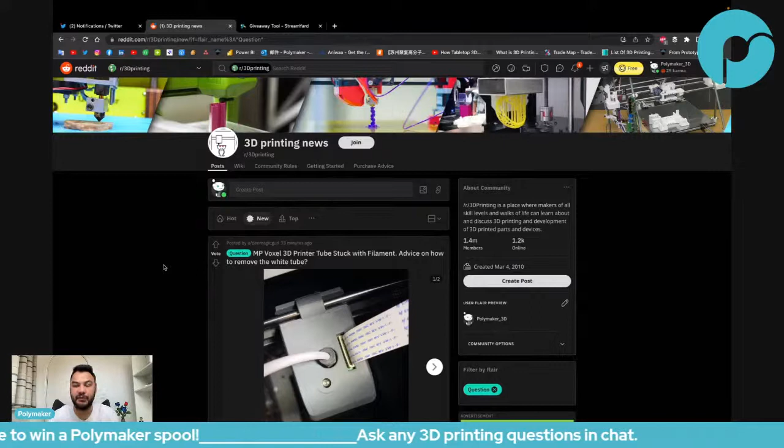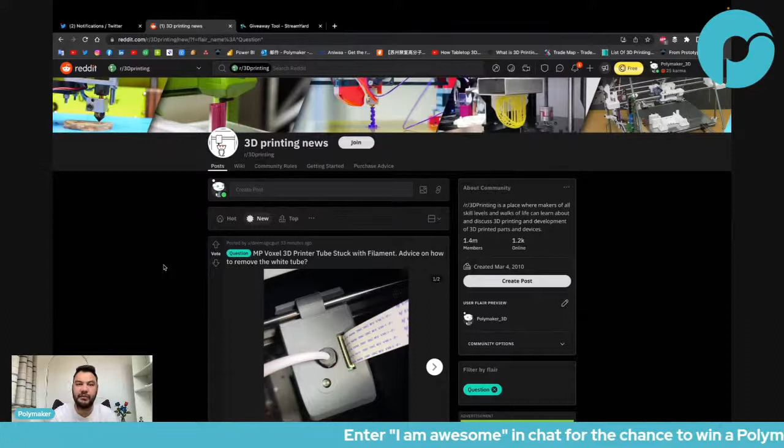So let's get started, good day Randy. Let's get started. So like always, if you have any question, any 3D printing question, whether it's for Polymaker itself, any new filaments, anything related to our company, feel free to ask. And then anything related to 3D printing troubleshooting - if during the week, since last Tuesday, you had some issue with your 3D printer, any material or setting issue, setting recommendation, feel free to ask. If you have some question related to materials, for example, what's the difference between different materials, or about application, what's the best material for that - any particular question, feel free to post it in the chat, and then we'll answer them.

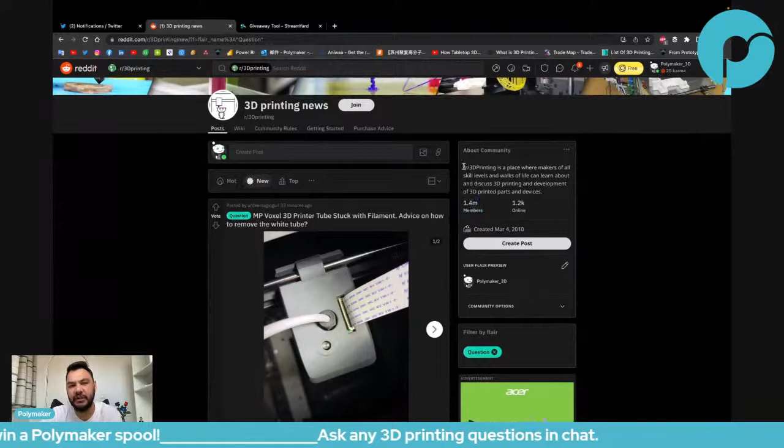And then at the same time, we are going to go through our regular Reddit questions. As you know, this community is a huge community - I think almost 1.5 million members. So you can see a little bit how big the 3D printing community is growing in the world, or at least in the English-speaking world for that particular community. I mean, when I joined the community, I think it was less than 200,000, if I remember well, and that was 6 or 7 years ago. And now you have 1.4 million people. That's crazy how many people have started to use 3D printing.

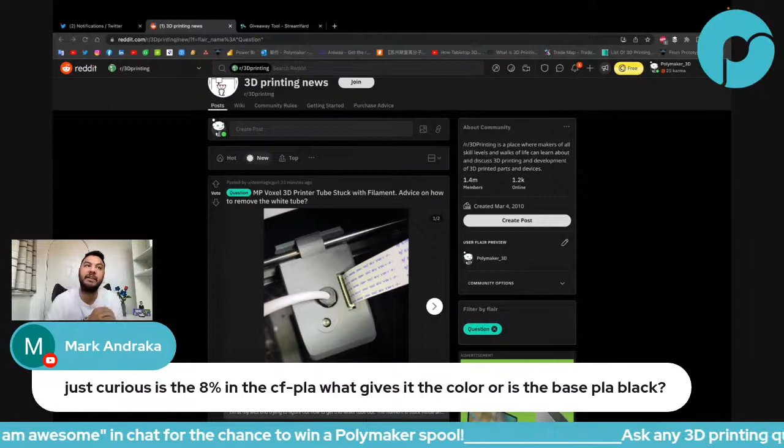Mark Andraka: Just curious, is the 8% in the CF PLA what gives the color, or is the base PLA black? No, everything comes from the carbon fiber. Actually, that's one of the main reasons we cannot do any color with PLA CF - it's because the CF itself makes it black. So even if we add color masterbatch of any other color, it would still look black. Maybe a different kind of black, but yeah, everything comes from the carbon fiber.

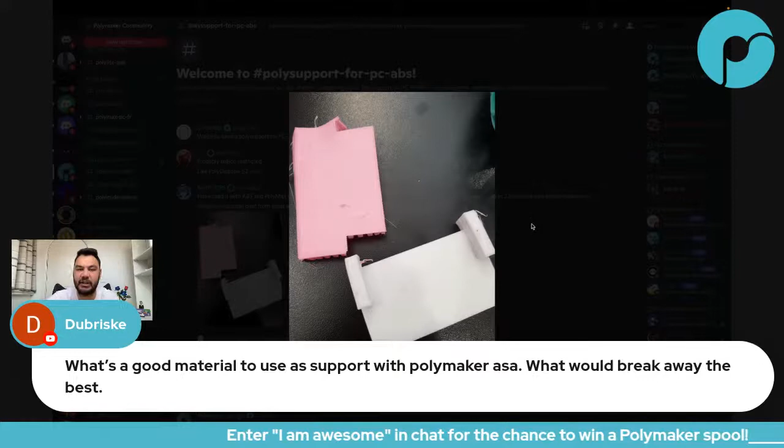What's a good material to use as a support with Polymaker ASA? What would break away the best? You know what, the best material, which will arrive very soon on the market - we removed it for 2 months - is this one, Poly Support for PC-ABS. So if you go on our Discord, you will see that material. It's a pink material, you may know Poly Support for PLA, and this is Poly Support for PC-ABS. So it's more for high temperature, and it works extremely well with ASA. It's a breakaway support. It was available in beta testing, so depending on where you're based, it was available in the US and Canada, and it was removed 2 months ago, and it will come back next month with revisions. We had some feedback from the beta testing, we reviewed the formula, and it will come back.

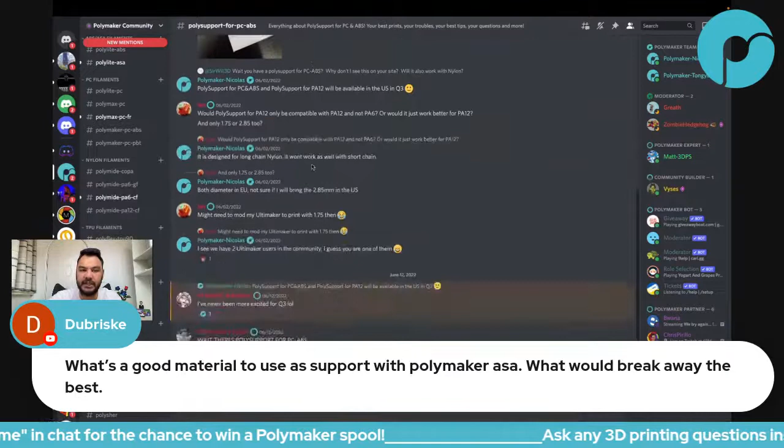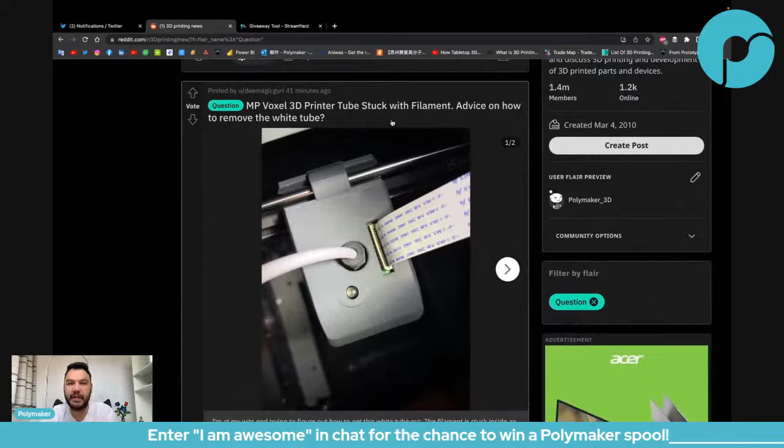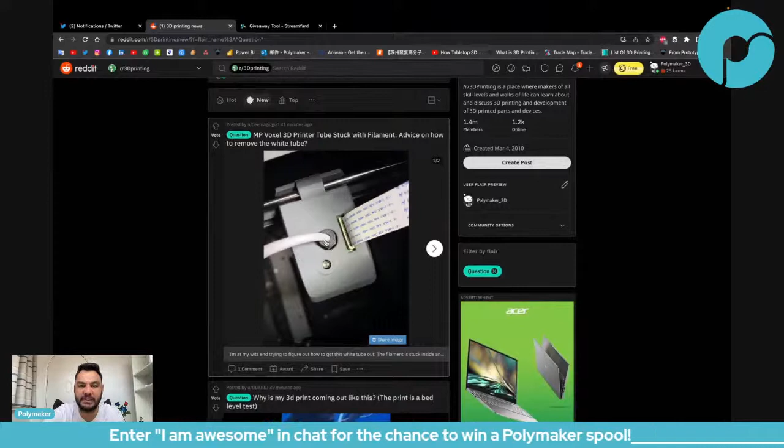Usually to remove that, you just have to press the thingy - I have no idea what it's called, but most pipe systems use this idea. If you pull it, the hooks will catch on the pipe. To prevent that, you have to push the ring here. If you push that ring, then you'll be able to remove the PTFE tube. Yeah, exactly, the small ring here. I guess it's the same system - I haven't seen any other 3D printer that doesn't have this, where you push that ring to prevent the small hook inside from catching the PTFE, and then you just remove it.

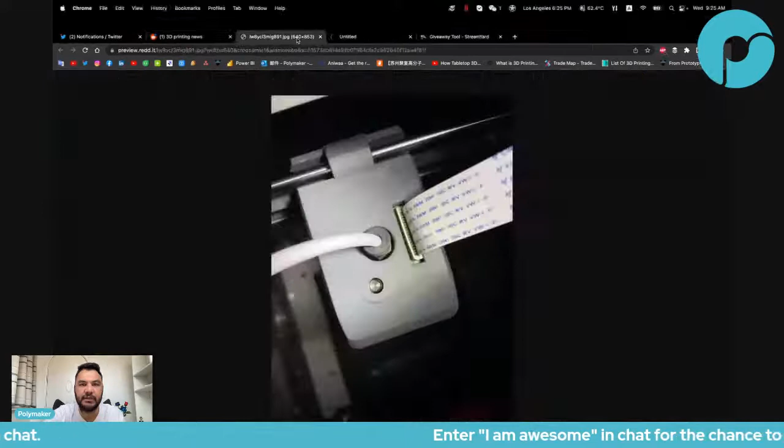Actually, there is one comment - let's make sure his issue was answered. What was that printer? MP Voxel 3D printer. Oh, the Monoprice. Okay, the Monoprice 3D printer. Hard to tell from the photo angle, but if it's the feeding tube pneumatic fitting, you push down the ring. Okay, so that was answered.

The next one. Okay, next question from Jon: Hey Nick, I was wondering, can you overdry filament? In most filament dryers, does it become more brittle?

No. So to answer the first question, you cannot overdry filament. If there is no moisture, then there's no moisture - it's not going to affect anything further, there's no such thing as over-drying. And then, does it become more brittle?

Yes and no. Yes, in a way, because when you're drying the filament, you're applying heat to the system, and if you're drying it, it means your filament has moisture. When you mix moisture and heat, that's the perfect combination to degrade your filament. So the more you dry your filament, the more you're going to degrade it, and the more brittle it becomes. So the fact that it's dry isn't what makes it brittle - it's the fact that drying it puts it in the exact condition to degrade the backbone of the polymer. You break down the polymer into smaller chains, making it more brittle. That's one part.

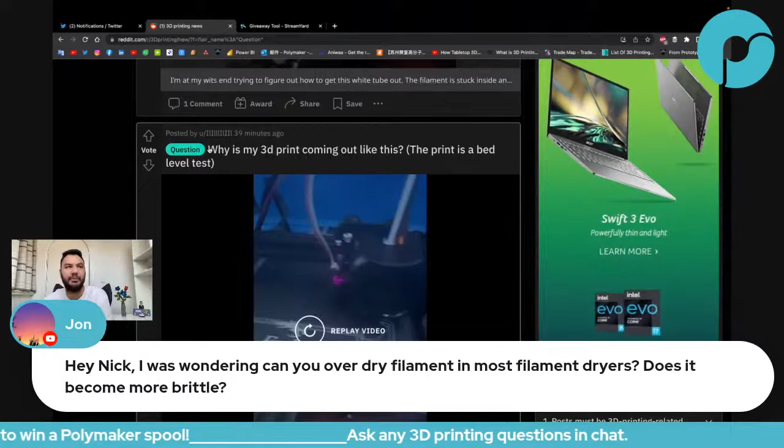The other part is: the drier the filament is, the more rigid it becomes. So you could take this as brittle, but brittle means it's rigid but weak. The fact that there's no water molecule inside will make it more rigid, but not necessarily weaker. So hopefully that answers the question.

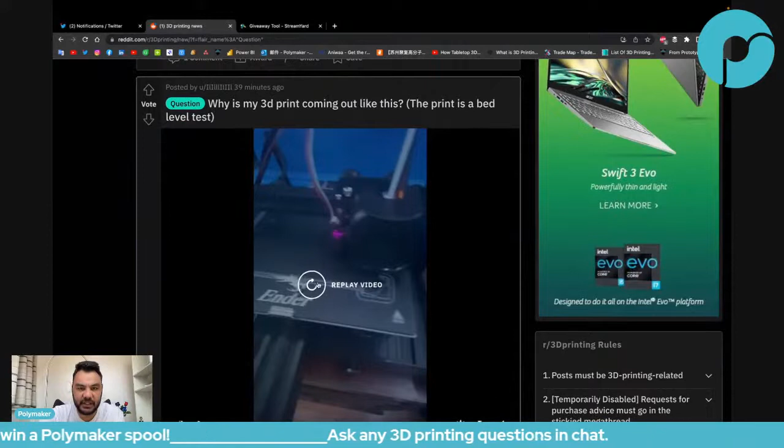Okay, so why is my 3D print coming out like this? Let's check out how it comes out. Okay, so most likely bed leveling - there's no bed leveling, especially since he's doing that bed leveling test. So I'm pretty sure. If we take a look more clearly, I'd say it's too close to the bed, and it's squishing the material out, and this squishy material is catching on the nozzle and creating all this stringy stuff.

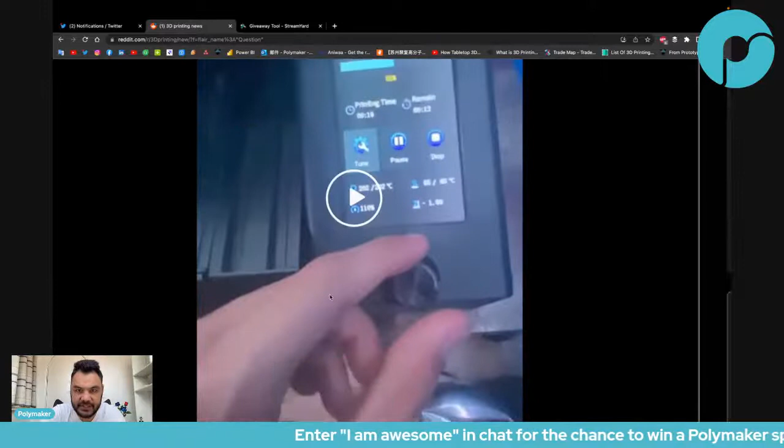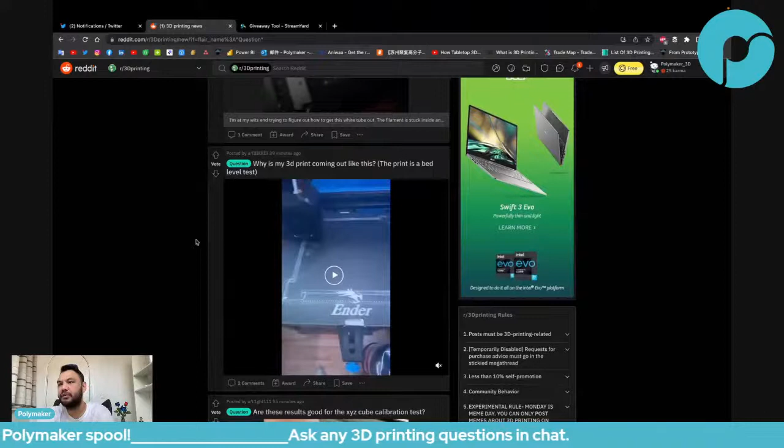But it seems like on most of the bed it was too close. Yeah, I guess that's the issue here. Too far from the bed or too close? Yeah Jon, I think too close. The fact that there is stringing could make us think it's too far, but I think the stringing is caused by squishing the filament, and it comes out the side and catches on the nozzle, creating the string.

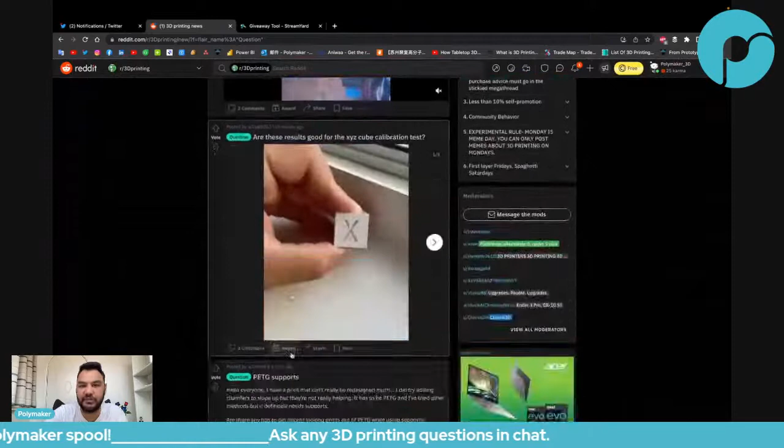Hi Stephen Poole, do you have any 3D printing question for us today? Hi Austin, thank you for joining.

Are these results good for the XYZ cube calibration test? So the calibration test, a lot of people are using it for different purposes. We talked about it on Print Busters in the flow calibration - if you're interested, you can go... let me put that on this side... if you're interested, you can go on our Discord.

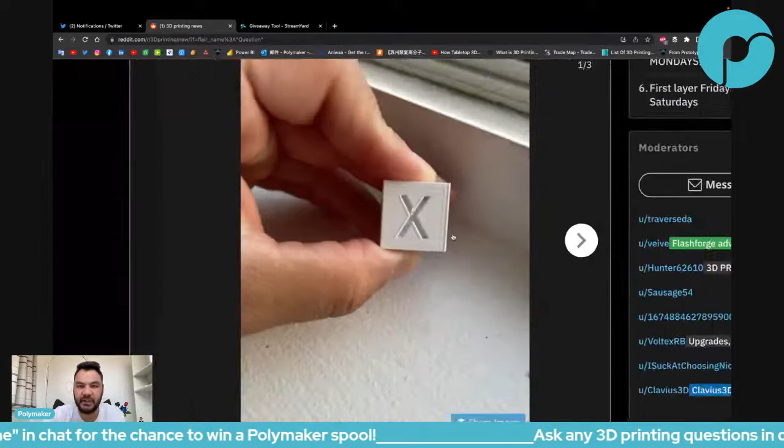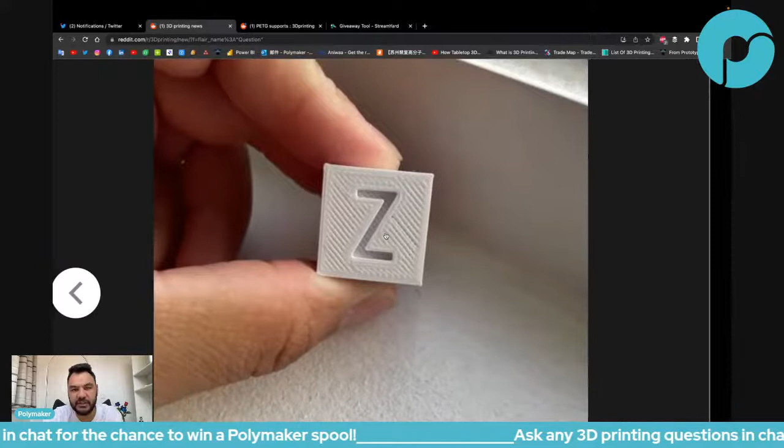PETG support, let's go check that. Under extruding maybe - you're talking about the other picture. Yeah, I didn't check actually. Definitely the top layer doesn't look very good, most likely because it's under extrusion, like you said.

You can see it's under extruding not because of temperature, but because of speed, since short paths extrude better than long paths. That means once it reaches a slightly higher speed, it's under extruding, or it's a problem with the fact that most printers don't have linear advance. I would use linear advance and recheck my flow - that should solve the top layer issue.

Actually, some people use top layers to calibrate their flow. As long as there are gaps, they keep increasing the flow. I think Zombie, for example, uses that technique to calibrate his flow.

I'm so awesome, I won't enter to let other people win. Thank you, Non-Fam, for thinking of other people.

Needs tuning on the top layer.

Yes, FDAF patch, you're right. Oh, FDAF patch - I think you're from Mexico, right? I think I ordered your spool yesterday. You won somewhere in the last few weeks, and I ordered your spool yesterday.

How do I calibrate my X steps? Zombie, wrong stream - that's Print Busters territory. Your level of question requires Print Busters, Zombie, not our regular Q&A here.

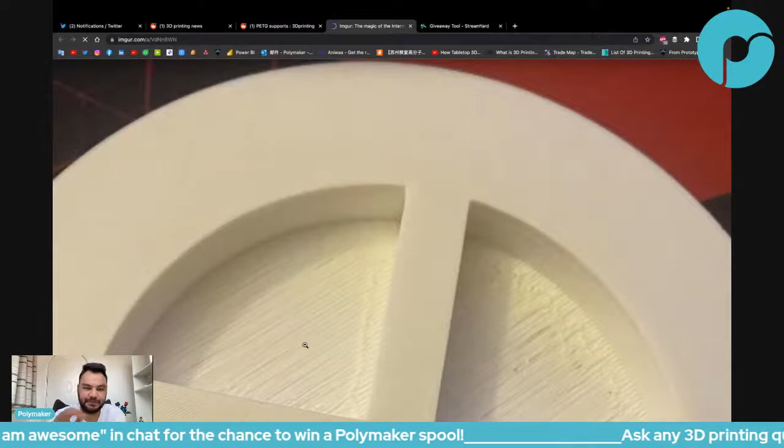How to make that one better? With... yeah, so he's saying his support sticks like crazy to the PETG.

Usually the harder the support is to remove, the better the surface quality. So if this was printed with support very hard to remove, I'm not too sure how he can improve that. But I doubt it, because when I check the surface quality, I doubt the support was difficult to remove. My favorite support settings are triangle pattern, 10% infill, 3 dense layers with 80% infill density for the dense layer, and then 1 layer gap. It's usually a little hard to remove because of that thick dense layer, but I usually get a perfectly supported area. So that's what I use.

I don't know what his settings are. I wish he would have shared a picture of the support itself or the setting. But that's what I usually use.

I like the triangle pattern because it's very rigid for a low infill. I always put that wall around my infill to make it stronger, though it's not very necessary in this case. I always use horizontal expansion, but in this case it wouldn't help. I also always use XY distance between the vertical wall and the vertical wall of my support, at least 5 millimeters between the wall and the support so it's easier to remove. Otherwise it may weld on the side. Usually I get very, very good results with that support.

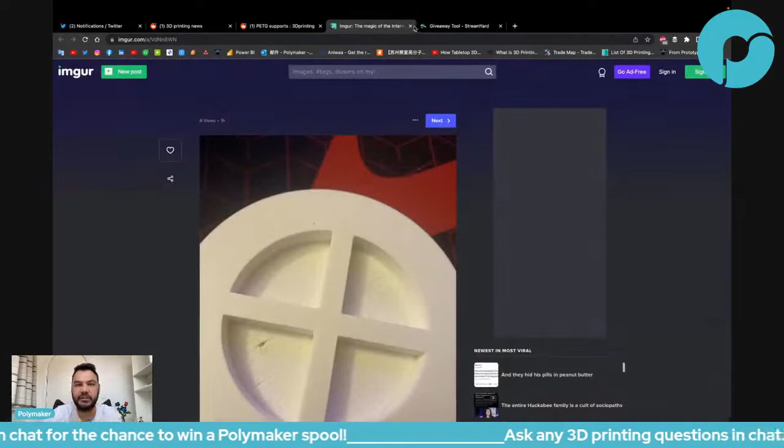I'm obsessed with printer calibration. Yeah, then you go - go join our Discord. There's a lot of people obsessed with printer calibration there.

PETG support can be a real pain. Yeah, because PETG has one of the best layer adhesions. If you're printing in the right conditions, PETG will usually have the best layer adhesion of any material. I define layer adhesion by the ratio between the Z tensile strength and the XY tensile strength. That's how I define layer adhesion.

Forrest Gibson: I want to do a test with different materials. I see sample packs, but it's versions of the same material. Could I reach out and put together a sample pack to compare different materials? But it's versions of the same material.

Forrest Gibson, I don't understand your question - I want to do a test with different materials, I see sample packs, okay so let's go check them - but it's versions of the same material. No, it's not versions of the same material. If you go check our sample, we have the sample box here, and it's definitely not versions. You have like the sample box: PLA, PETG, TPU, PVB, wood, then ABS, ASA, PC, breakaway, PVA, nylon, then PA6-GF, PA6-CF, and then PC, PC-ABS, PC-PBT, PC-FR with some magic glue. So it's not different versions of the same material.

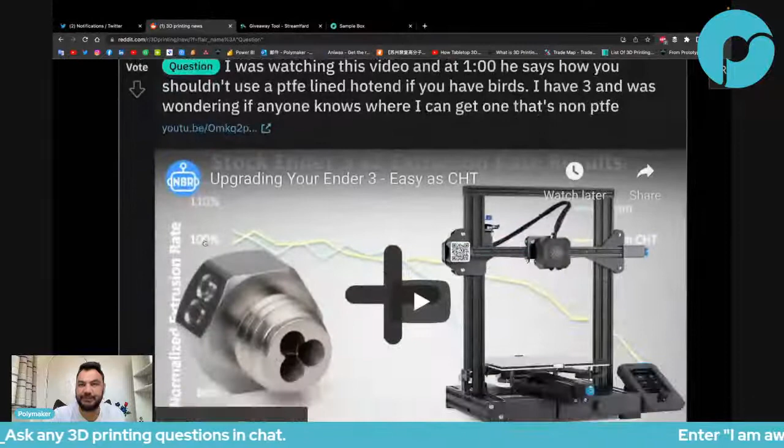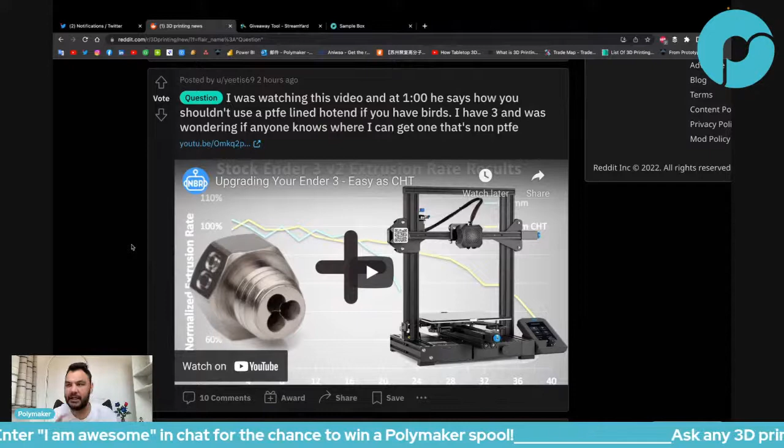Fumes and microparticles, not draft. The 3D printing fumes. Is PLA better than ABS? Is that a thing? Sorry, I'm half paying attention. Yeah, no worries, zombie. We're talking about the fumes, but don't worry, I'll send you a message after the stream.

I was watching this video, and at the 1 minute mark it says you shouldn't use a PTFE lined hot end if you have birds. Wait, what? If you have birds, is that birds like the animal, or does birds have a different meaning in English? At the 1 minute mark, every once in a while, with a PTFE lined hot end, if you have any birds in your house, you definitely shouldn't use a PTFE lined hot end. He just throws that information out like this: PTFE lined hot end, if your bird is experiencing open mouth breathing. Okay, so I guess it is the animal. Most likely I have no idea of the context, but I can guess.

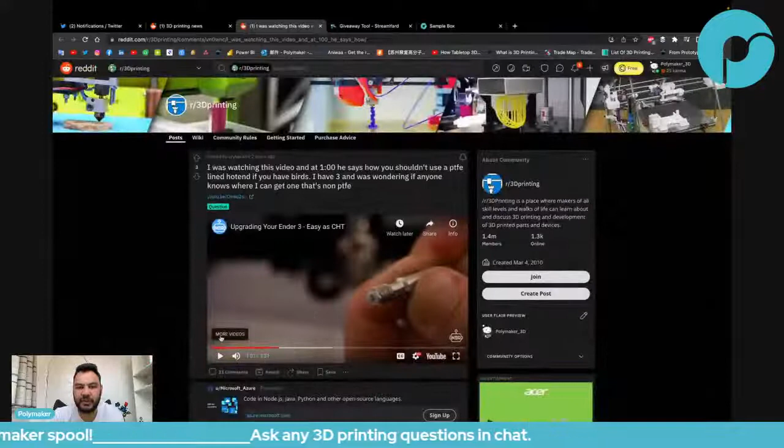My guess is the PTFE in the nozzle, well, we were talking about fumes, right? So I guess that's clearly the issue here. Somehow the birds are more likely, maybe the fumes are more toxic to the birds than to us, I guess, or something like this. But yeah, it's interesting. I guess whatever animal or whatever is breathing in the house, whether it's you or your pet or birds, we all suffer the same thing when it comes to breathing something bad, right? We all like oxygen and don't like the rest. I guess, but it's interesting. I was wondering if birds was really birds, or if it meant something else.

Oh yeah, that would be great. Melting plastic, PTFE is very toxic. Yeah, I heard that birds are more sensitive to PTFE tubes. Oh okay, I didn't know that. PTFE fumes, oh it's about the PTFE decomposition due to high temperature. Birds are very sensitive to chemicals. Oh okay, yeah, I guess some animals are more sensitive than others.

Okay, got it. You want an all metal heat break? Yes, and I guess for much more reason than just the fumes. I think the all metal heat break is a good idea, especially for maintaining high temperature. I like birds, like bird in mines. Oh, that's why they use birds in the mines. If the bird just dies, then you better run out of the mine. Oh okay, because they are much more sensitive than us. Good point, good point. Yeah, I knew about those birds used in mines, but I wasn't sure. I wanted to make sure it was a bird. But okay, got it. Hi, Santiago.

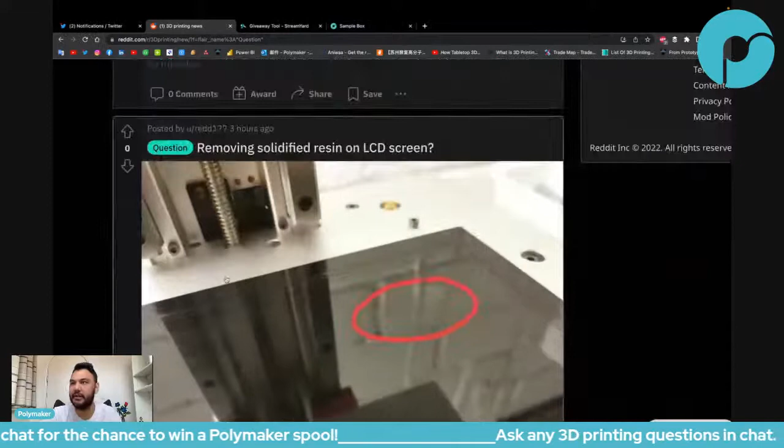Removing solidified resin on the LCD screen. Okay, so that's not FDM. Any good video for learning Fusion 360?

First time the extruder does that sound. Should I be worried? Will it die soon? Okay, let's hear that sound and identify if your printer is going to live overnight.

Hello, Jake from State Farm. And I also like, Close Encounters of the Third Kind.

I don't understand why they can't include a 50-cent metal heat break. And also like Close Encounters of the Third Kind. I didn't understand that. Well, it's not loading.

First time the extruder is making that noise, I want to hear that noise. If you are looking for an image, it was probably deleted. Oh okay, so nothing. But now I'm curious, what kind of sound would make you worry? Like the clicking when it's printing?

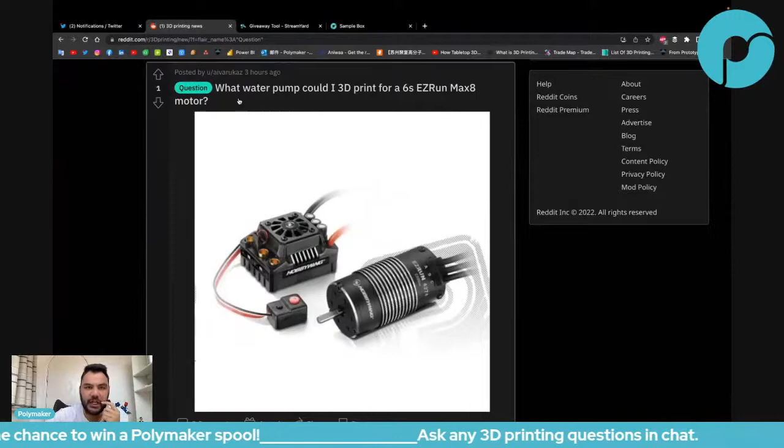Newbie question, what happened and how to fix it? If you're looking for an image, it was probably deleted. So is it all the images deleted, or just this one? Okay, so it's just this image. Sorry, I cannot help without an image.

Dumb question about springs, struggling with flexible filament, anybody has advice? Okay, that's a good one. How to print flexible, like very flexible.

Close Encounters is a movie, they use a bird to test for radiation. Oh okay, yeah, I didn't know that movie. Maybe that's why I didn't understand the message.

Got it. I've been trying to print some parts that need to be pretty soft. Okay, and I could use some help, advice on how to work with it. The filament I'm using is Core X Shore 60A TPU. Core X? What's that brand?

Is anyone here using Core X? Core X filament, I didn't know that brand. Coex? Core X or Coex? Core X Shore? Huh, was it a typo? Maybe it was a typo. Coex, okay interesting, and they make some very, very flexible TPU, right? Search our product, TPU.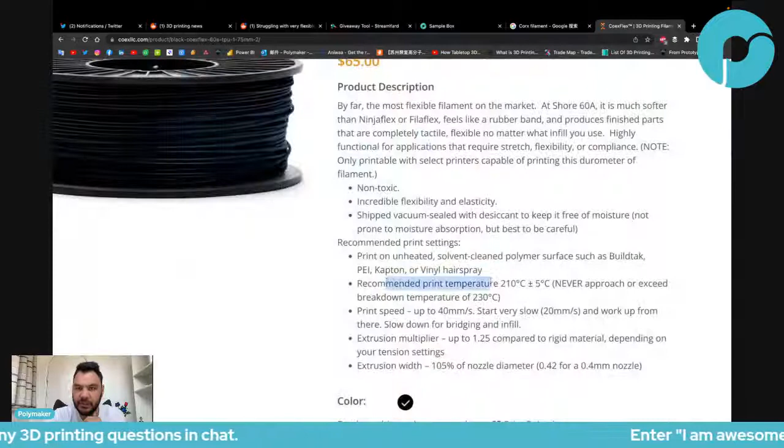Non-toxic, blah blah blah. Recommended print temperature, 210 plus minus 5, never approach or exceed breakdown temperature. Oh, the breakdown temperature is 230? Really? Oh, that's interesting.

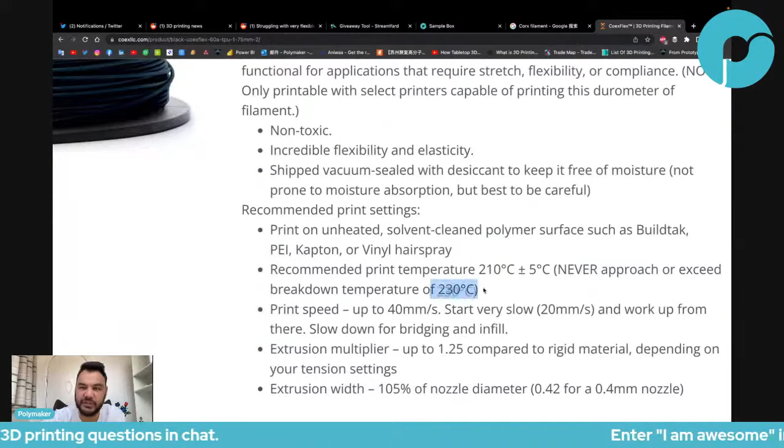I print most of my TPU above 230, so I would have made that mistake, obviously. I would definitely have made that mistake. Oh okay, that's interesting. That's the first time I see a material that cannot print above 230 or at 230.

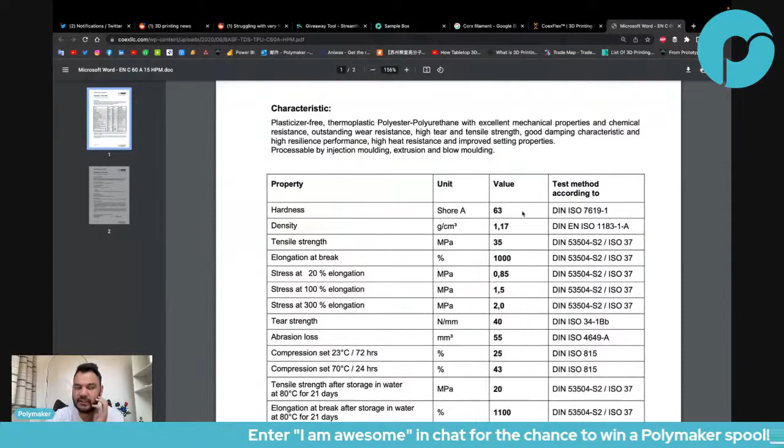Interesting, breakdown temperature. That's a TPU, okay, that's interesting. Okay so it's Shore 63 density, tensile strength. Okay, interesting.

Anyway, so what was the question? For some reason it's not extruding well at all, just barely spurting out materials. Does anybody have experience with similar filament? I'm using Prusa i3 Mark III.

Okay, blah blah blah, okay. So that's definitely the common issue with flexible filament. So the first thing I would say is a lot of people need soft models or soft things for the application, and when they think about soft, they think about very very flexible filament, very soft filament like 60A, for example, instead of going the regular 95A.

And for me, I think that's the first mistake. The first mistake is to think that if you need a soft thing, a soft model in 3D printing, then you need a soft material. But that's not the case. The Shore hardness is very useful for injection molding because it's 100% infill anyway, so the only softness you get is from the material.

But in 3D printing it's completely different. You can have a model that is softer than another one, even though this is a rigid material and this is a flexible material, because it all depends on the structure. The flexibility in 3D printing depends as much on the structure as it depends on the material. In injection molding, it mainly depends on the material.

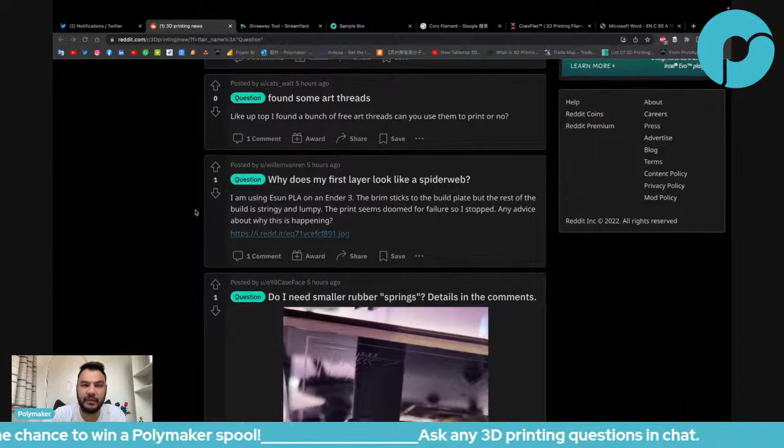Found some art threads—what is this? Up top I found a bunch of free art threads. Okay: why does my first layer look like a spider web? Spider web, let's have a look.

I'm using Esun PLA, okay I understand now. I'm using Esun PLA on an Ender 3. The brim sticks to the build plate, but the rest of the build is stringy and lumpy. The print seems doomed for failure, so I stopped—any advice about what's happening? Yeah, so first, it seems you're printing with black, okay, but the first layer isn't black, right? And actually, the first layer does not exist.

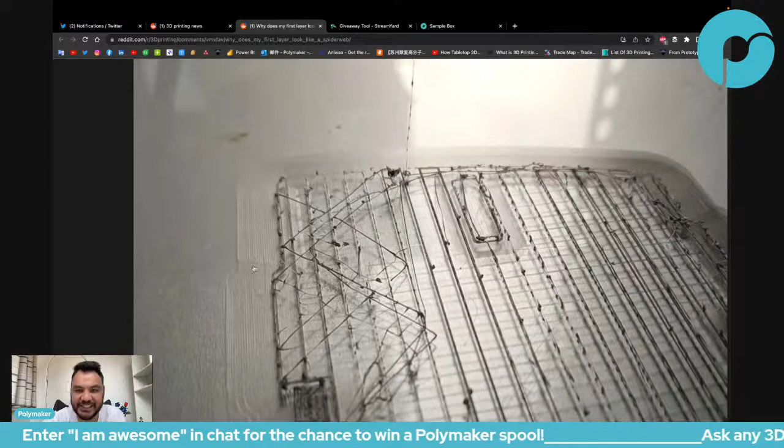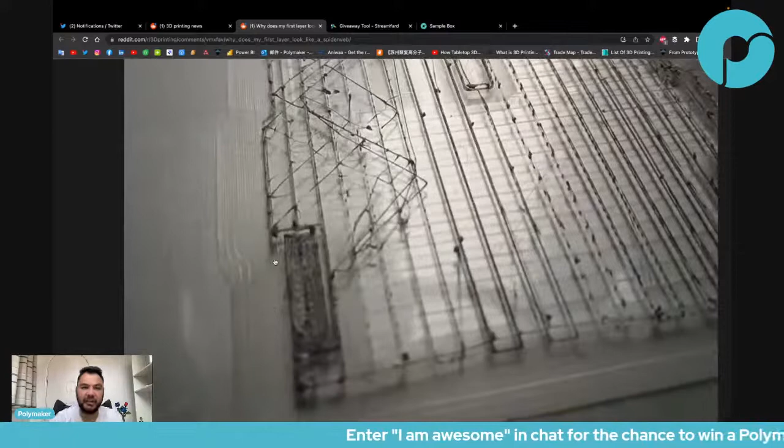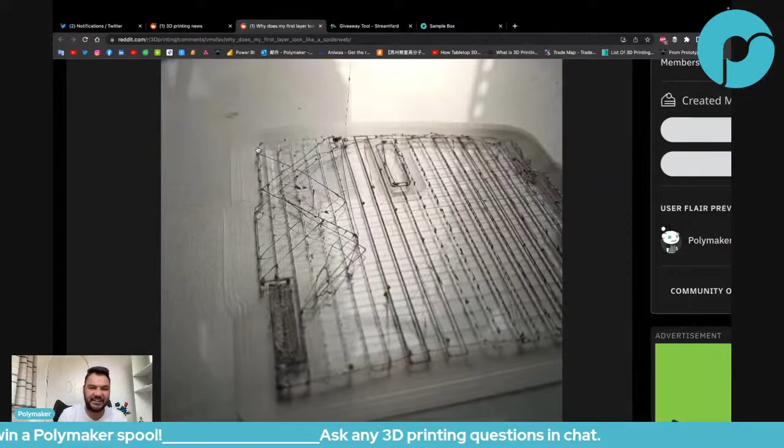It was squished so much on the build plate. I don't know if you're printing with PVA as the brim or the first layer, but it's an Ender 3, so most likely not. So most likely you've been scratching the nozzle for the whole first layer. I mean, it already gives me—how do you say—cringe or chills, I don't know how to say it in English, but just imagining this whole first layer with the nozzle completely squished, unable to extrude, just scratching the whole way, and most likely the extruder was clicking the whole time—I don't like that feeling. But that's most likely what's happening, because you can even see the first layer support here, it's completely—yeah, that's the problem, but that's my guess.

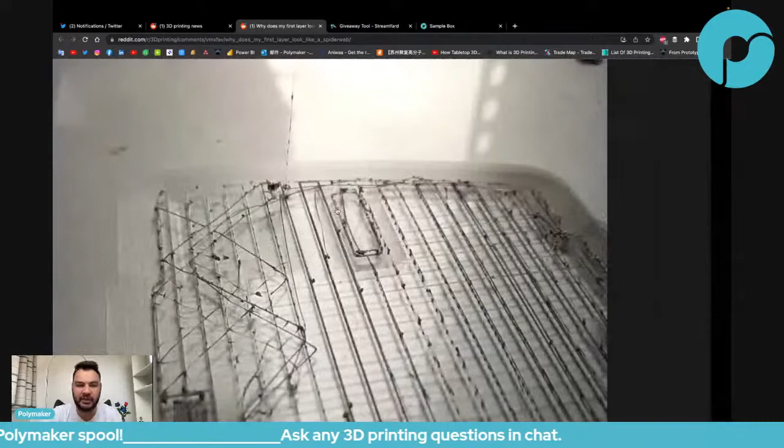If you're printing with black filament and you check your first layer and it's not black, that's a sign something is happening. Most likely it grinded your filament or something was damaged, and then it couldn't extrude properly afterwards, or maybe your nozzle partially clogged. But if your first layer was with the same black PLA and it looked like this, that's very bad news.

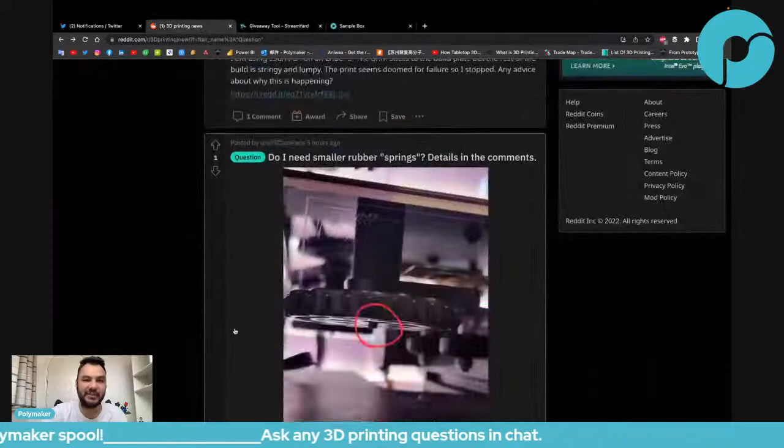Do you think it might be partially clogged? It could be, but the main thing is that first layer. I don't like to see that, it makes me feel strange, just imagining that thing happening. That first layer is thin... I mean at this point it's not thin anymore. I've had that happen, cringe. Yeah, it makes me cringe. If your first layer is transparent, it's too close.

That's how you learn, by making some basic mistakes. Okay, do I need smaller rubber springs?

Details in the comment, okay let's go check the details. But definitely this is normal, I mean yeah this is normal. It doesn't matter because you go up and down with your knob.

Just put your end stop lower. Where are the details? Details in the comment. So who was writing this?

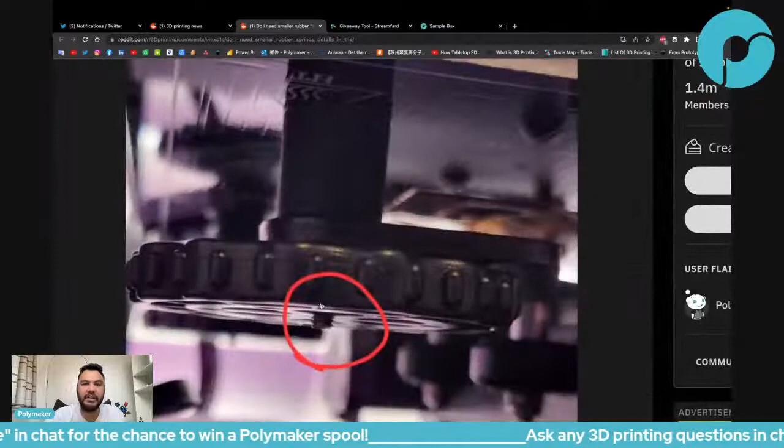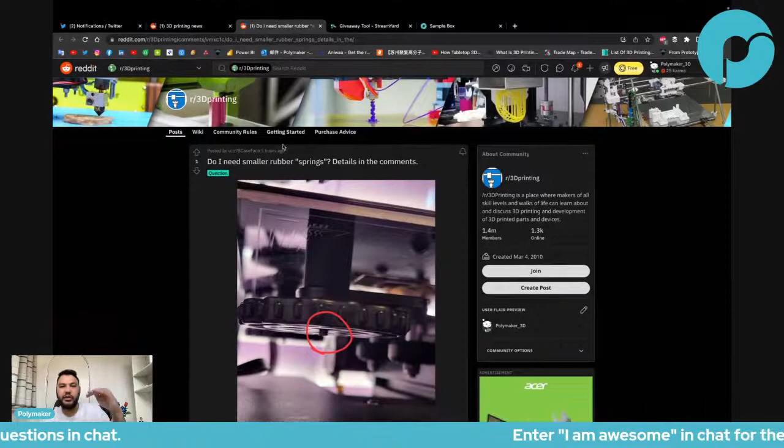So like the first comment says, just put your end stop lower, and that solved the issue. You can see the Z stop as the coarse leveling and the knob as the fine leveling. If the knob reaches its limit, go back to the coarse adjustment, then come back again to the knob. We had that question in the last stream, I think.

I have no idea what went wrong, help. Definitely under extrusion, I guess. Ooh yeah, oh that looks bad.

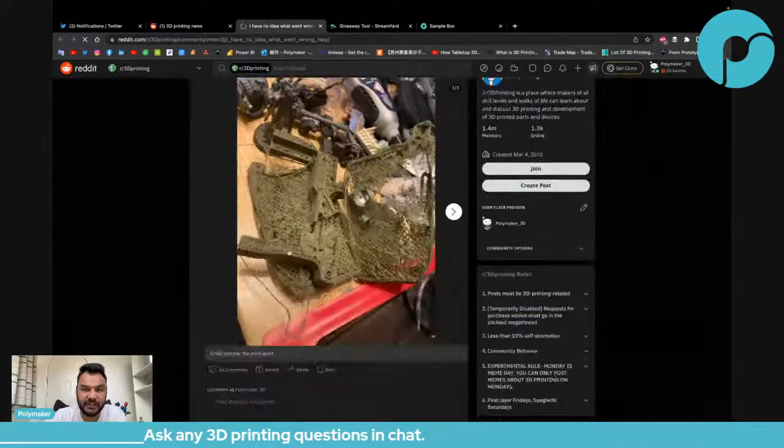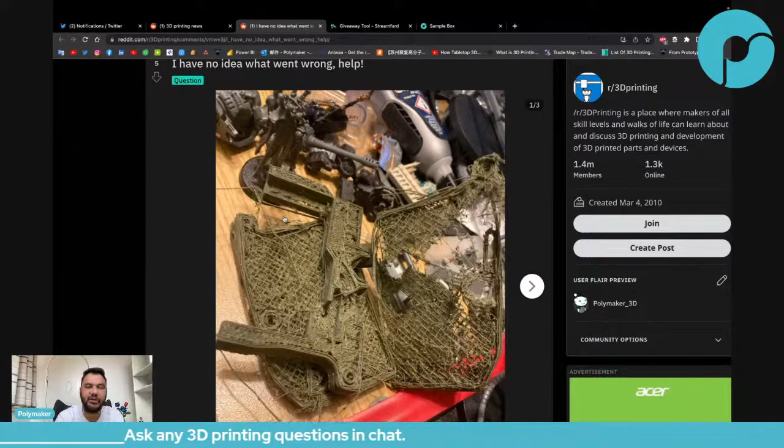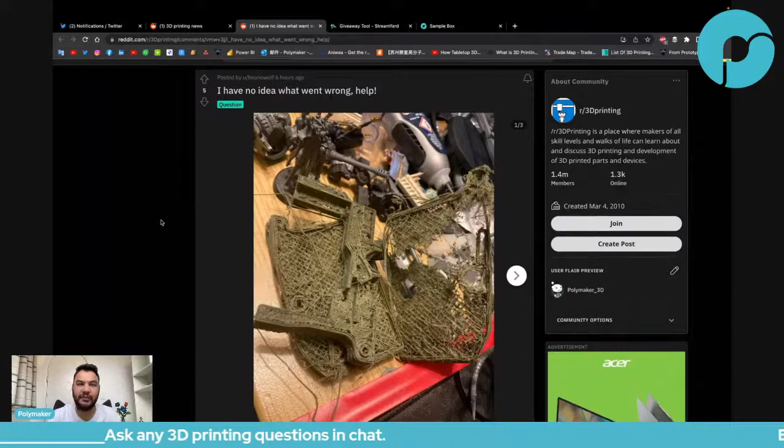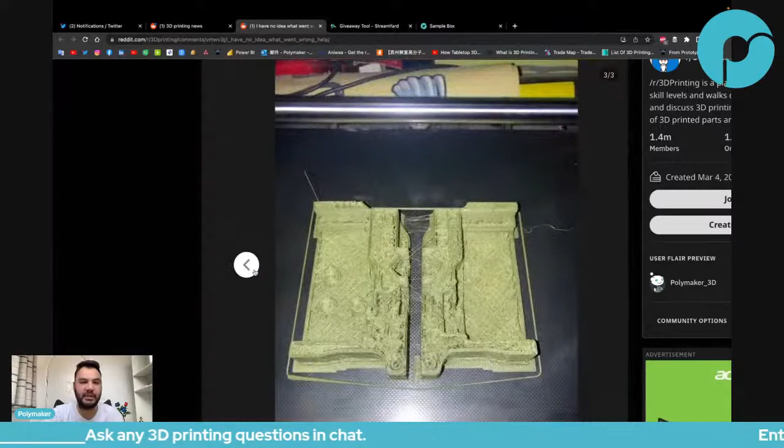Is there any more details? I mean at least give a little bit more. I don't know, maybe when you're a newbie, when you just start 3D printing, you don't know that at least you have to give material or a little bit of context, what printer or this kind of thing. But when you're new to 3D printing, maybe you don't even know there's different types of material, or how important temperature is for troubleshooting. So maybe I understand. But if you have issues and you're seeking help, always try to give as much context as possible. Pictures are the most important, so at least in this case we have pictures. Pictures speak way more than you trying to explain what's happening, so at least we have that. But on top of that, if you give a little context on the picture, the brand, the type of filament, the settings and the print model, that would be great.

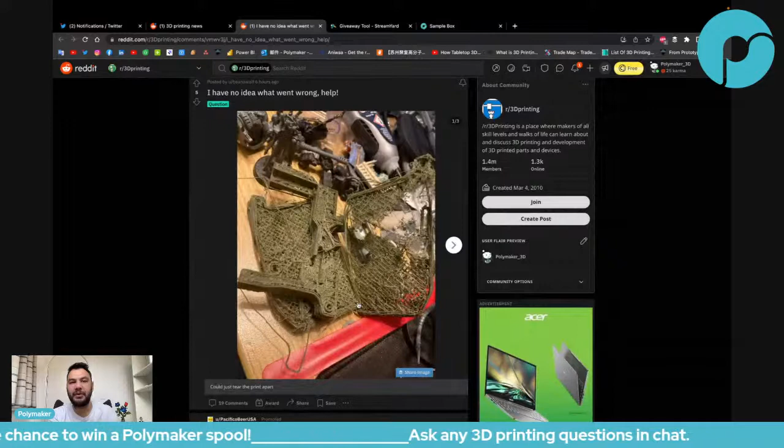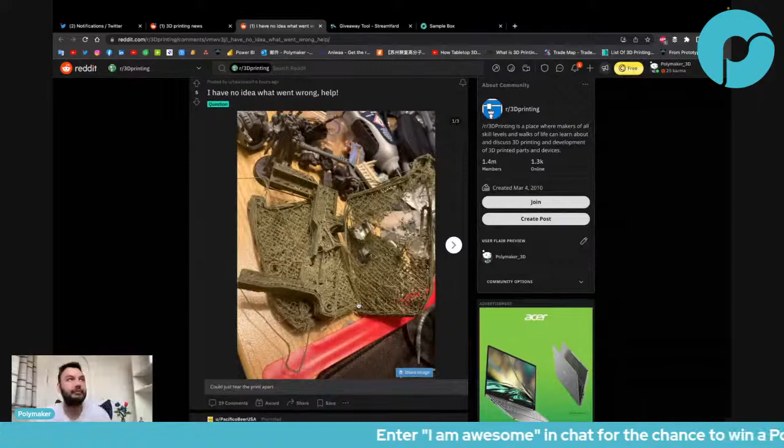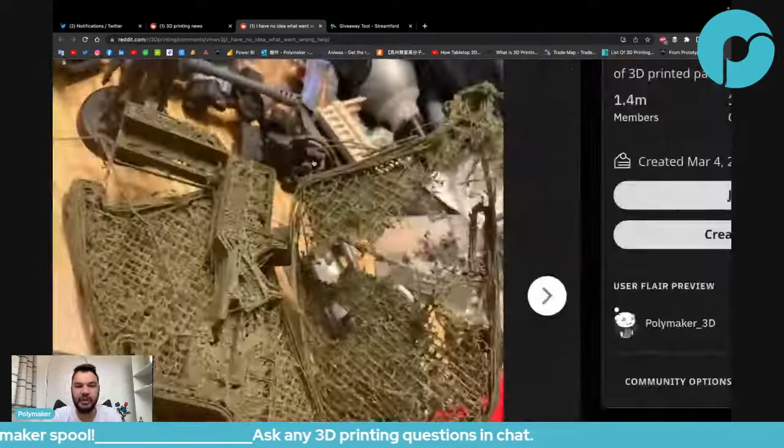So the issue here is definitely under extrusion, it's not extruding as it should be. You can see the shells are not touching each other, it's not even overlapping the top layers and the shell, and the infill is completely under extruded. So I would check all the stuff related to under extrusion: partially clogged nozzle, too low temperature, too high speed, heat creep, all of this kind of thing. There's a long list of stuff you can check for under extrusion, but it's definitely under extrusion. What went wrong? I have no idea, but the issue you're having is under extrusion, so you can look that up and see all the things that go with it.

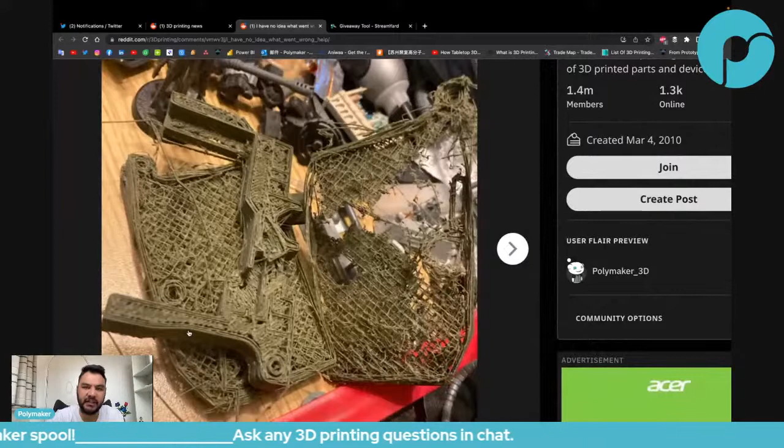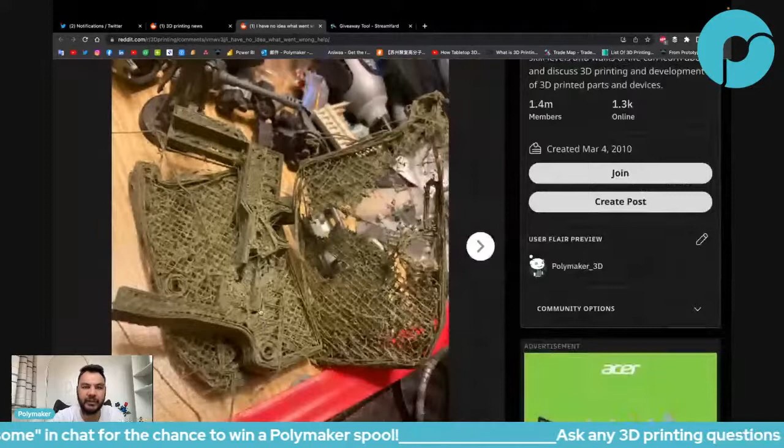Most likely, in your case, you've been using default settings, so my guess is something's going on with your nozzle. You have some miniatures at the back, so it seems like you're more of a maker, so most likely something's wrong with the hardware more than your settings. I think you have good settings, so check your nozzle, change your nozzle, or check your nozzle first. That would be my guess.

That's what I like when I'm troubleshooting. A good troubleshooter is going to define your issue and give you a bunch of things to fix it. A very good troubleshooter is going to define the issue and define what type of customer you have in front of you, and try to really dive deep and find the actual thing that's going on. I think that's the beauty of troubleshooting, if you can find exactly in one email what's going wrong, then you're a very good troubleshooter.

What I like is when I'm doing customer service at Polymaker and I receive all these emails, I like when I send one email with one way and the answer is, oh thank you, you solved my issue, everything is fine now. That's so satisfying, rather than you send an email and most people would send one back saying, okay what material, what printer are you using? And then I'm using this and this. Okay, is it working with other material? And then it answers back, no it's not working with other material. And then you have all this back and forth email. What I like is to skip all of this and just think very hard, get all my experience, and have that one email that's gonna solve his problem.

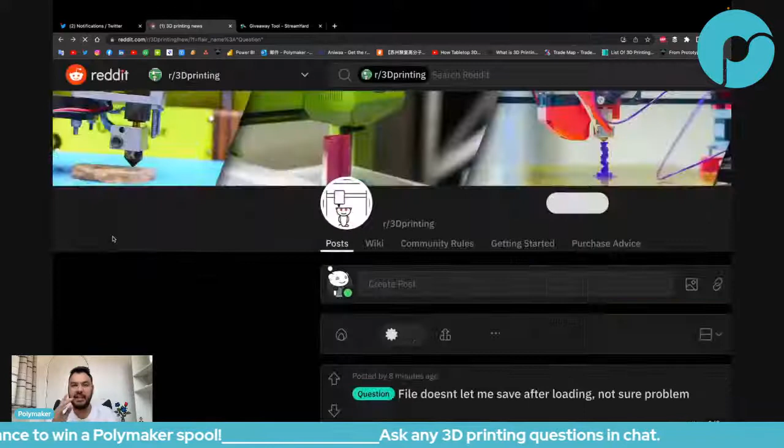So I may need to refresh. Drying and storing filament are very different. To dry filament, you need the box to be open, and to store filament, you need your box to be closed. Just from the fact that in one case it needs to be open and in one case it needs to be closed, makes that product impossible, right? Or you need to have some moving part or something like this. So you may or may not see an amazing product coming in that category somewhere early next year, but at the moment I haven't seen any product that can store and dry the filament at the same time. If you have, then please share it.

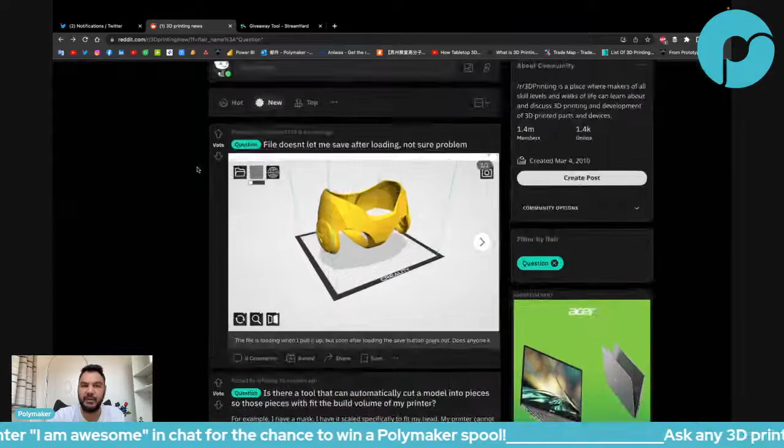File doesn't let me save after loading, not sure what's the problem. Well, don't use the Creality slicer, and that should solve the problem.

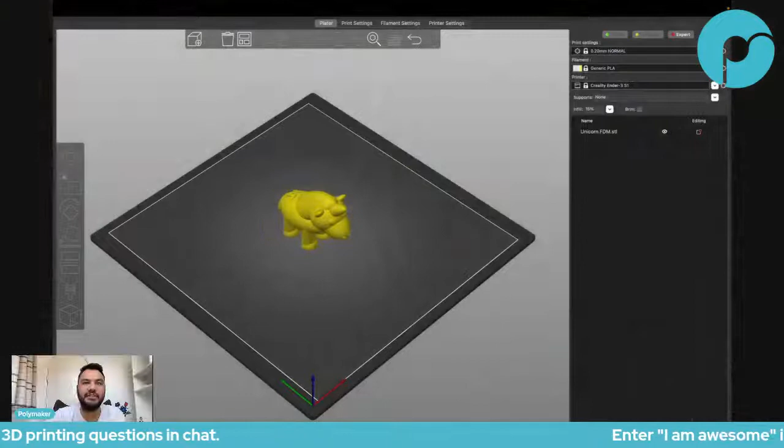Is there a tool that can automatically cut a model into pieces so those pieces will fit the build volume of my printer? Yeah, just go on Prusa Slicer. There is something called cut your model, something like this. Let me show you - I don't know if you can cut vertically, though. I know you can cut horizontally, but I don't know if you can cut. Let me put my unicorn on there, and let me share again. So I'm extremely new to Prusa Slicer, but I know there is this tool here that allows you to cut your model. But is there any Prusa Slicer user out there in the chat?

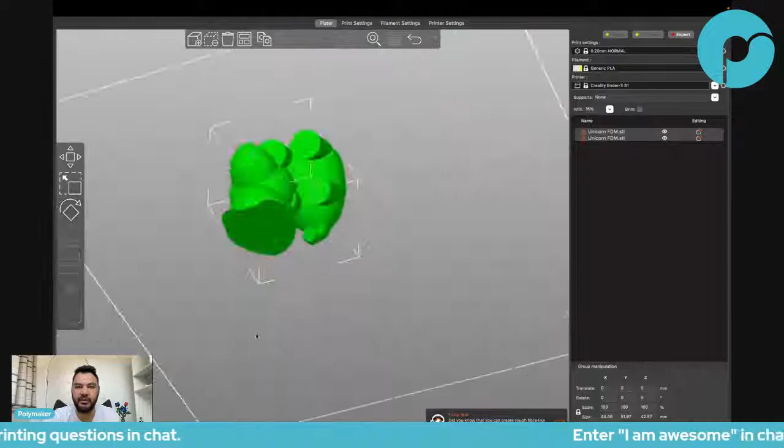Can you cut it as you want, or only in certain ways? I guess you just have to turn the model, right? If you want to cut it differently, then you cut it. Then you can pretty much cut it in whatever way you want. There's this tool that's very straightforward, directly on the slicer. You just cut the part like this, and then you have both parts on the build plate. So that's one way to do it.

Or you can use Tinkercad and just use the boolean to cut your model. There's many ways to cut your model. I just mean I always go for solution first and treat each case unique. Yes, add negative volume and place it at the right Z height for the bottom layer. Oh nice, I've never used that feature.

Yeah, negative volume works also. But on Prusa Slicer, they directly have that tool.

Best 3D printer for beginners. Yeah, there's a couple of them.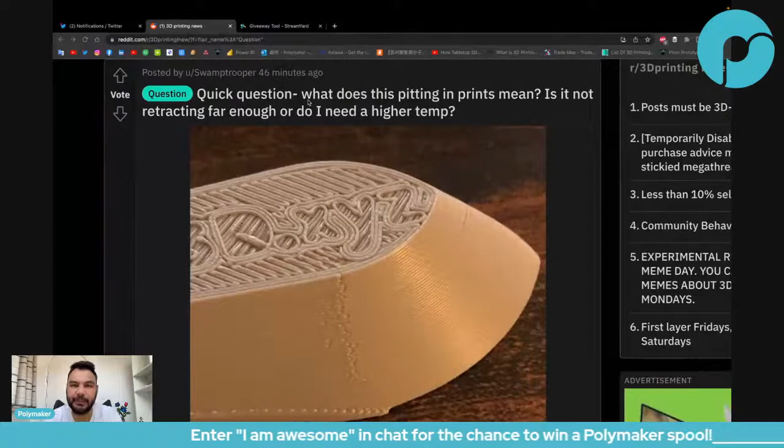Quick question, what does this pitting in prints mean? Is it not retracting far enough, or do I need higher temperature? Oh, you mean okay, so just check Z-seam, hide the Z-seam. That's the right keywords on Google. Hide the Z-seam, and then you will see a bunch of stuff.

Usually you can hide them in corners. So instead of putting them here, I would put it at the back of the Benchy. There is some writing at the back of the Benchy, you can hide it there because it's very difficult to get rid of it completely.

A second thing I'm using is wiping. When you wipe the nozzle, it's going to fuse a little bit more the end of the layer with the start of the layer.

And then what else can you do to hide this? So there's just hiding it in corners, the wiping feature, and I guess that's it. Yeah, the Z-seam will be there anyway. I don't know if you guys have other tricks to make the Z-seam less apparent, but that's the two for me. Hide them, and there is some special setting in the slicer where you can hide them and use the wiping motion in order to fuse them a little bit more.

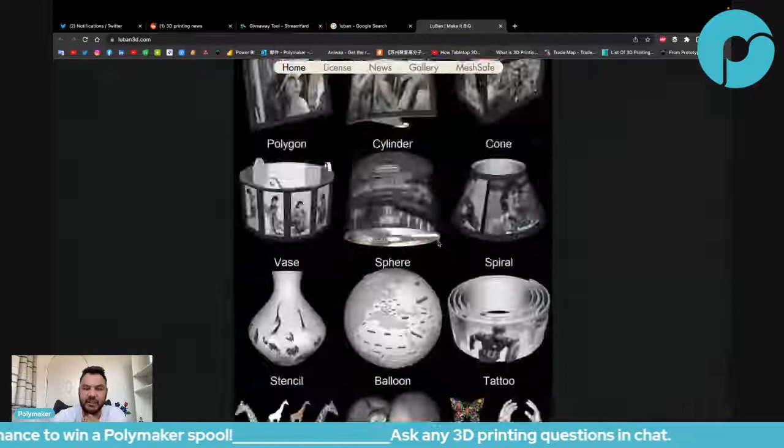Oh, that's interesting, make it big. Creation, Luban, user... Luban, generative design software that helps designers make rapid production in their creation. Download Luban... Lithophane, oh, so there's different things it can do. Oh okay, oh interesting. Okay, so Luban is a tool that has a lot of different features that usually 3D printer users are looking for, like Lithophane, for example.

Oh, that's interesting, thank you for sharing. Let me share that link there. So if you all have a 3D printer, you may need one of Luban's features. I just shared the link in the chat.

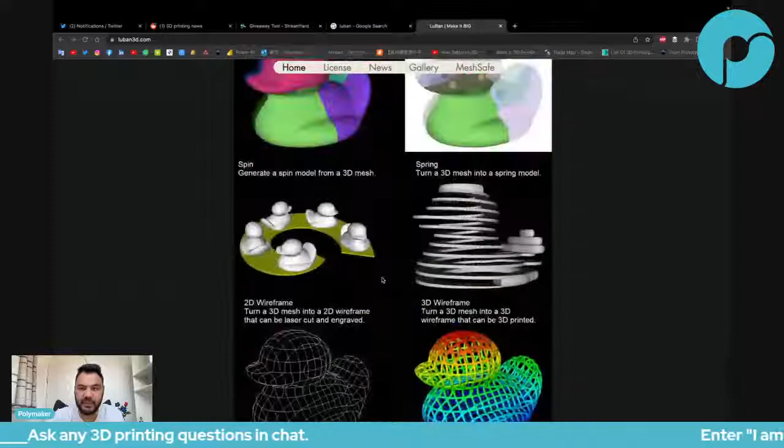It looks pretty good, they have very interesting features, all related to what we would need in 3D printing. Very nice, very nice, thank you for sharing, Stephen.

Also, that Benchy needs first layer tuning. Yeah, actually I thought it would be about the first layer, but apparently it's about the Z-seam. Turn off combing, I think, can cause it. Combing, really? Okay, interesting. Vase mode, yeah. Yeah, Santiago, that would be, yeah, I guess you're right, that would be the best way to completely get rid of it.

Having a slow Z increasing, I haven't thought about it. Smart hiding and sharpest corner, yes. Parallelized contour, yeah, it does a lot. Yes, yeah, I just saw that. Nice tool, I'm gonna get that. Yeah, check that out, I didn't know Luban, I haven't heard of it.

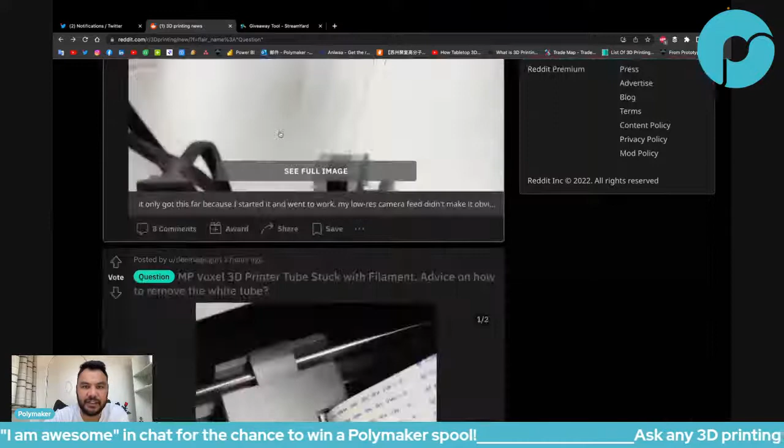I'm at my wit's end, how do I solve it? My wit's end? What does wit's end mean?

See full image, if you're looking for an image, it was probably deleted. Okay, how do I solve it? I have checked filament setting, adjusted flow rate, print Z offset, bed adhesion, first layer... Let me refresh, why don't I have access to the picture. Okay. Well, sorry, I cannot help you because I don't know what wit means.

Wit meaning? Sorry, wit meaning.

Mental sharpness and inventiveness, keen intelligence, a natural aptitude for using words and ideas. Okay, so I have even more no idea what it means. He's confused. That's what it means.

I'm at my wit's end. Sorry, I cannot help because there's no picture, so I don't know what's happening.

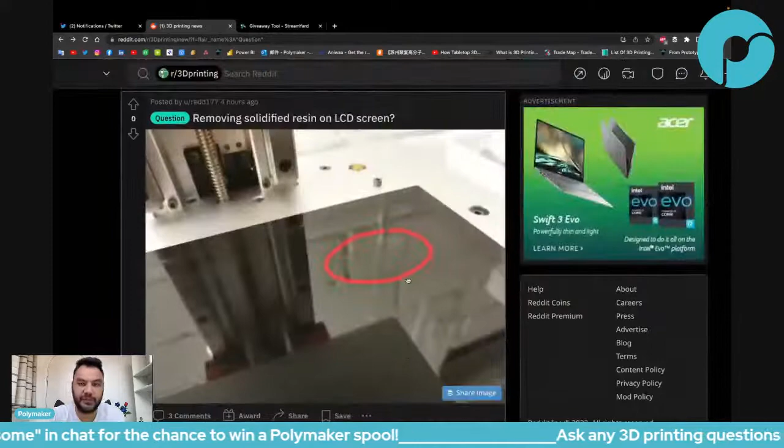Okay, so we got an hour and 15 minutes of Q&A. I think it was nice, we discovered some nice stuff. We may discover the Prusa slicer cutting tool. We just discovered the Luban 3D tool, which is pretty nice.

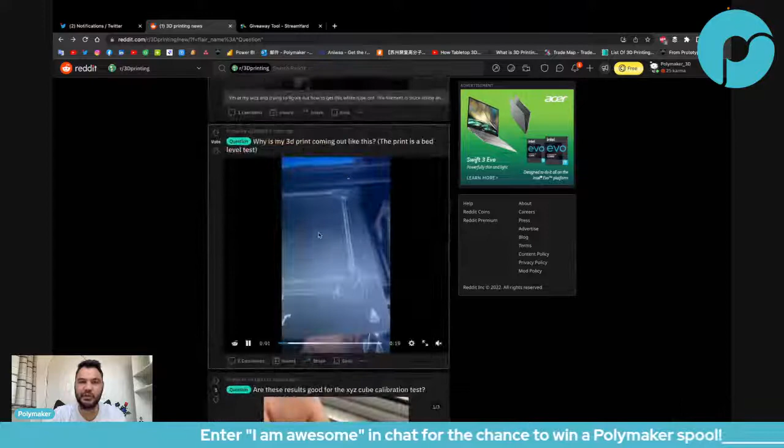We've had some cringe with that first layer that was completely squished on the bed. But yeah, that was nice.

So if there is no response, it means they are fed up. Okay, got it. Yeah, and I also learned some new English words. I think every stream I'm learning some new English word.

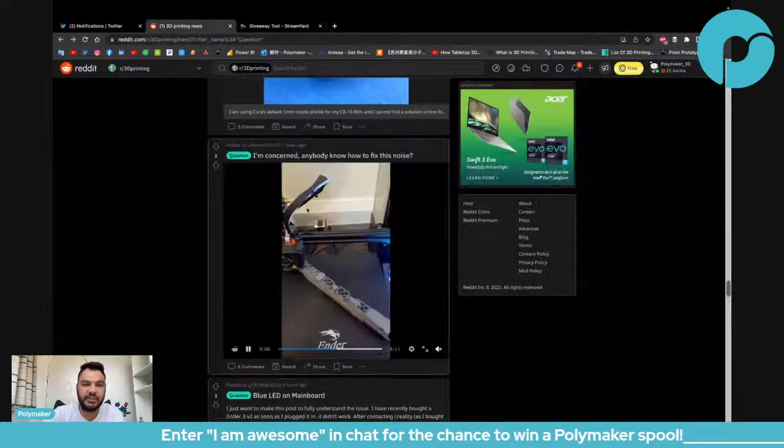Otherwise, we'll just continue. Every time I refresh this page, there are new issues and new issues and new issues. I mean, look at this: issues, issues, issues.

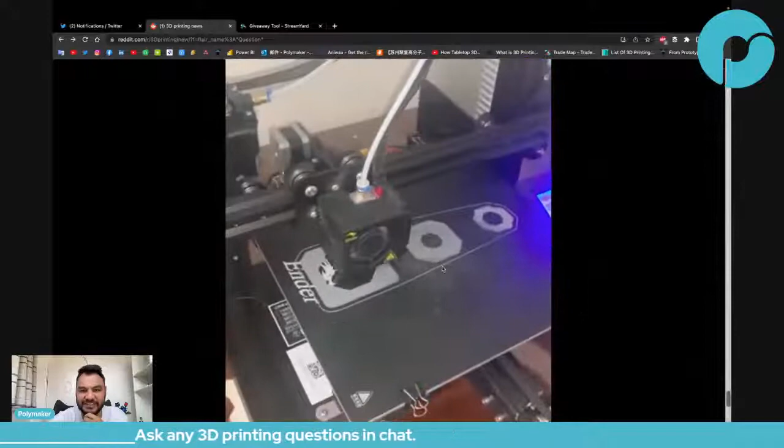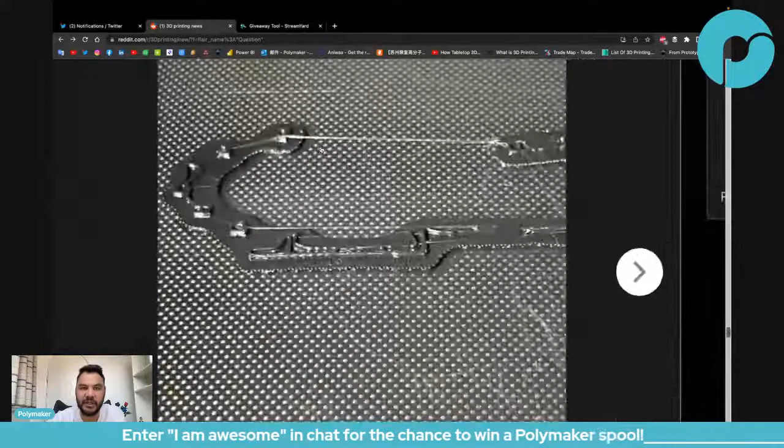But it's interesting. I like all of these things because it makes us learn more about 3D printing. Sometimes I end up on some issue I've never seen before. But all of these, I've seen before, and I start to have an idea of exactly what's happening.

And then, well, we were talking about the hull line on the benchy. There's a couple of them here. But yeah, don't worry, we'll always have something to talk about during the Q&A, because we have an industry that welcomes a lot of new people. We are one of the fastest growing industries, so we'll have this a lot.

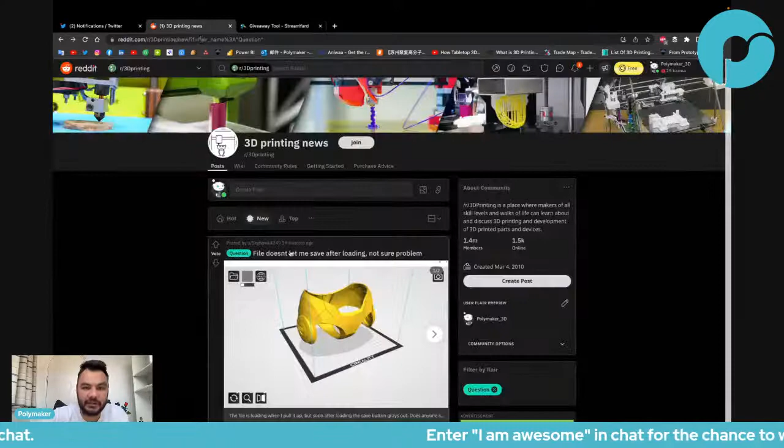The noise video loaded finally. Oh, really? I want to hear the noise. What was the noise about, the guy we were talking about, the noise thing? First time the extruder does that sound. Okay.

Did it? Was it loading? No, it was not. We will never know that sound, what it sounds like. So maybe it's my internet. I will share the link for you guys. But yeah, we will never know what that particular sound was that the printer was making, like this. That was the sound the printer was making while suffering with that first layer that couldn't extrude.

Oh, I cannot share the link. It doesn't like the VPN. Yeah, maybe.